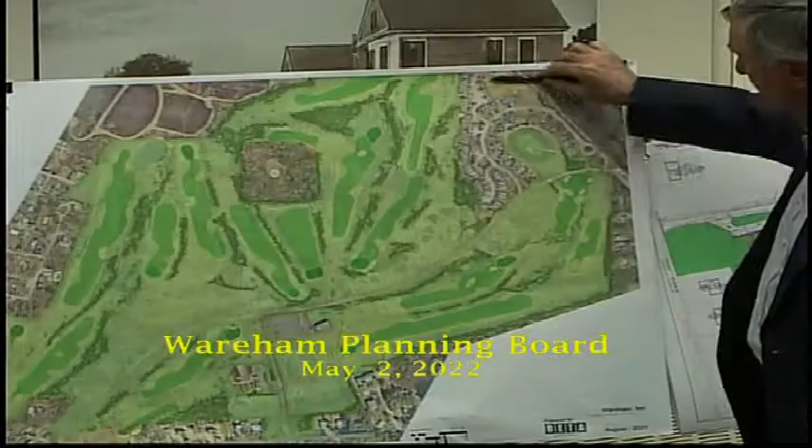So in 1964, the current Bay Pointe Club was designed by Geoffrey Cornish and came onto the market as Wareham Country Club. Some time went by, and in 1981, the property was transferred to Weedick, which was a quasi-public town of Wareham entity. In 1987, Weedick sold the property to Four Points Development. And at that time, none of this was here, so the entire property was all Wareham Country Club and a golf course.

Four Points Development Company developed the Bay Point Village Association and ran into some difficulty, and in 1991 transferred the property to BPG Corporation. None of these names mean anything - I'm not trying to be technical with names on deeds. I'm just giving you a sense as to the travel of the property.

In 1993, this property was financed by Bay Bank, a now defunct entity. Bay Bank restructured it and brought Weedick back in, and for whatever reason, and I don't know the details of it, again not important, took the 7 acres and transferred that to Weedick. Successor in interest was the CEDA entity, Community Economic Development Authority. So from 1993 forward, we've got the failed development of Bay Point Village at that time.

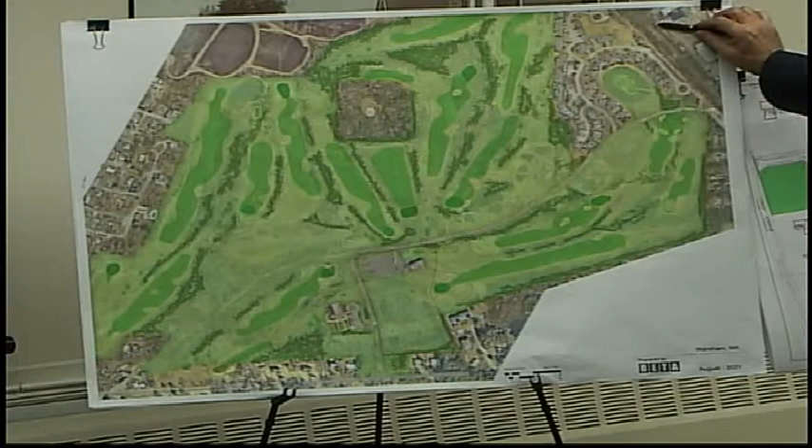Very successful now - I'm saying that by point of reference and time frame. Wareham Economic Development Corporation owned this 7 acres. With that were a series of easements that ran between the golf course and Weedick, and between the golf course and Bay Point Village. So that's the early stages of what was there.

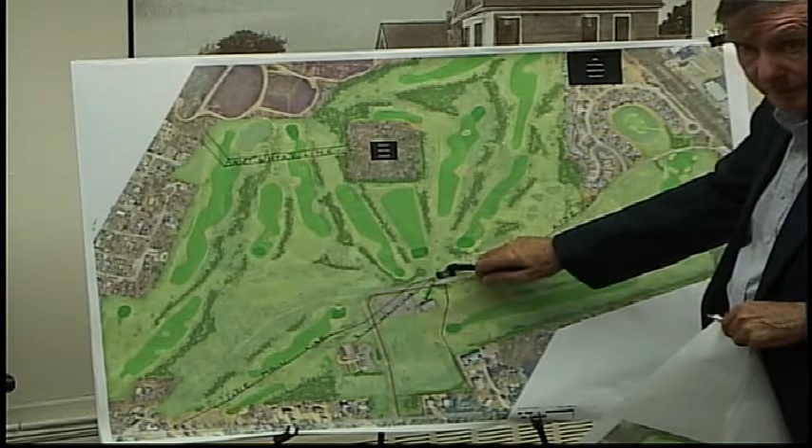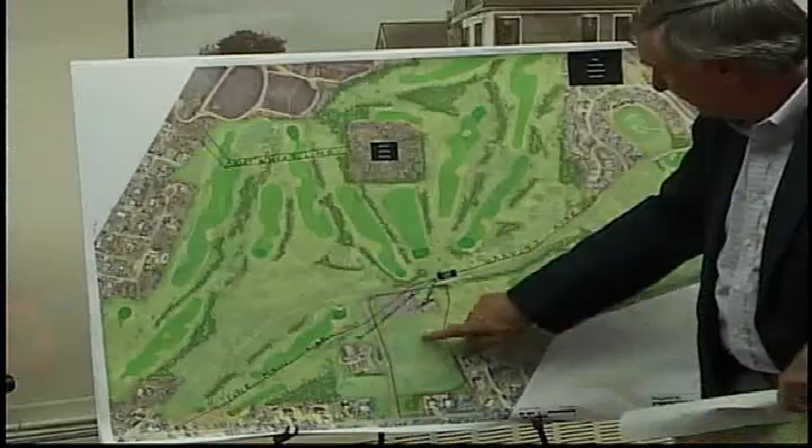So from that, Bay Point Village, owned by the same entity that owned the golf course, in 1989 put in a gravity line to the pump station that sits directly across from the Cedar property. Three gravity lines go into this pump station: a gravity line from Bay Point Village, a gravity line from the clubhouse, and a gravity line from the pavilion building. Those three go in, and the three go out to a force main down by Lacasse on Onset Avenue. Does that make sense? Does everyone have a point of reference as to what that is? The outline in red is the Cedar property.

So as you roll the clock up a bit, in 2002, Buzzards Bay Golf, Inc. acquires the property, I think really from Baybank and its restructured deal from '97, '98. Then in 2006, they sell the property to MLG, which was Mark Gibson and his development group. The property went into foreclosure with Digital Credit Union, with Mark Gibson being the owner, MLG, in 2011, and we acquired the property in 2012.

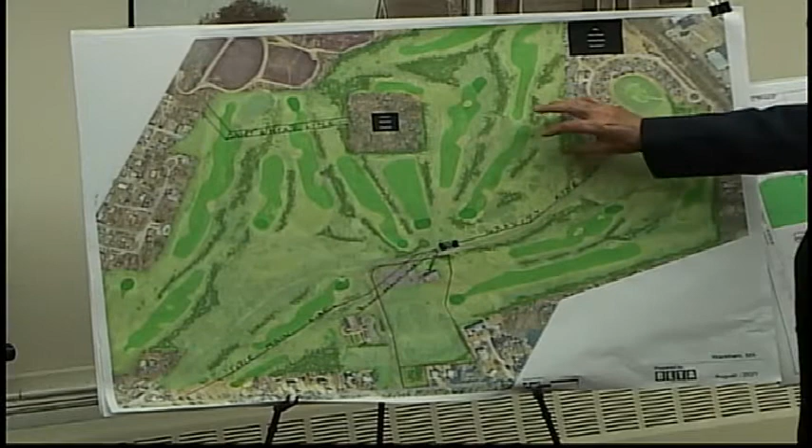From 2007 to 2011, the Gibson Group was advancing a plan for 40B housing. When we came in, there were plans everywhere for upwards of 260 40B housing units that apparently a development group called Minicelli was involved with.

They were trying to advance that, and then it kind of collapsed on its own weight. So from 2012 to 2022, we have owned the golf course. We've improved the golf course, and we've been advancing our vision for the development.

From the very beginning, we've been trying to acquire the Cedar property. As you pull into Bay Point Drive, the property is owned to the right by the town and to the left by the owners of the Bay Pointe Club. It's what's prevented us from being able to really do an entrance.

The early part of the property that the town owns is zoned residential. The balance of the 7 acres, we believe, is in the CR zone, although on a standalone basis it would be a non-conforming use because it doesn't have 100 acres associated with it.

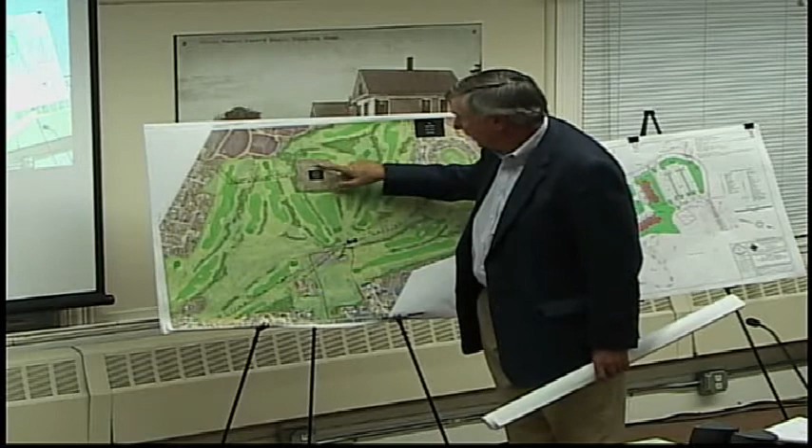In addition to that, the Onset Water Department, the big water tower that you can see, has an underground line that goes out into neighborhoods and the water tower. So that's what was there when we arrived. Gravity line along the property.

All this is Bay Point's property. We own all this, down to the pump station across from the clubhouse. Gravity line from the clubhouse to the pump house. Gravity line from the pavilion to the pump house. Force main out onto Onset Road. Make sense?

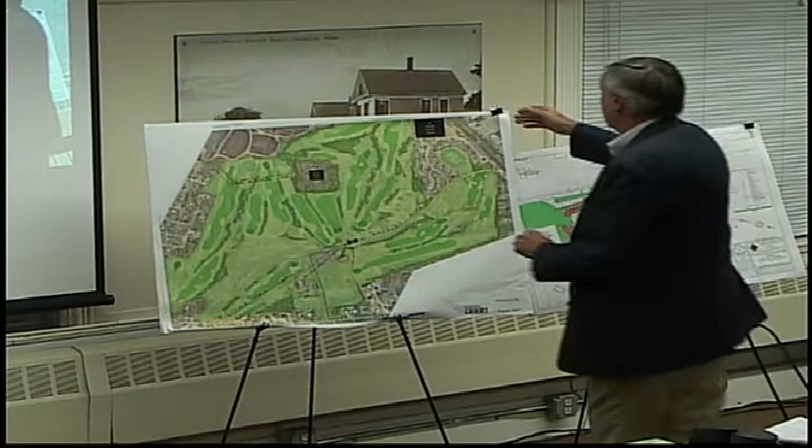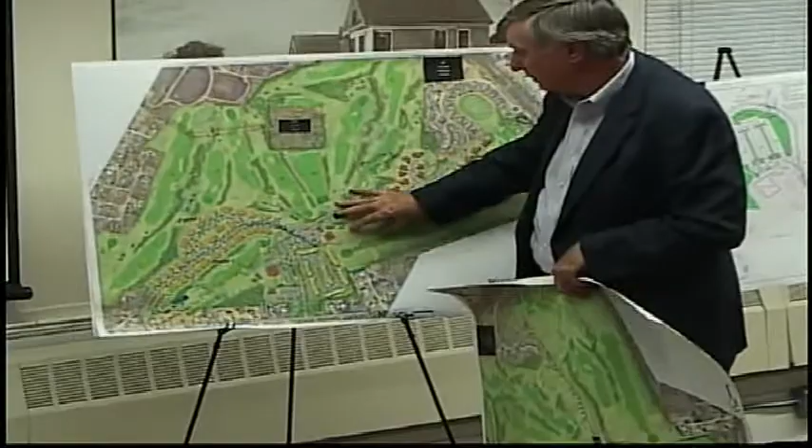This isn't exact, but most of it's exact. This is a couple of versions ago. There have been some minor changes. This is for illustration purposes. The number of buildings and units is correct. The number of units in phase 1 and phase 2 are correct.

I was surprised when the Bay Point Village came to the meeting with certainty and said they owned the pump station, and they said I needed their permission to do what we were doing. And they said a few other things.

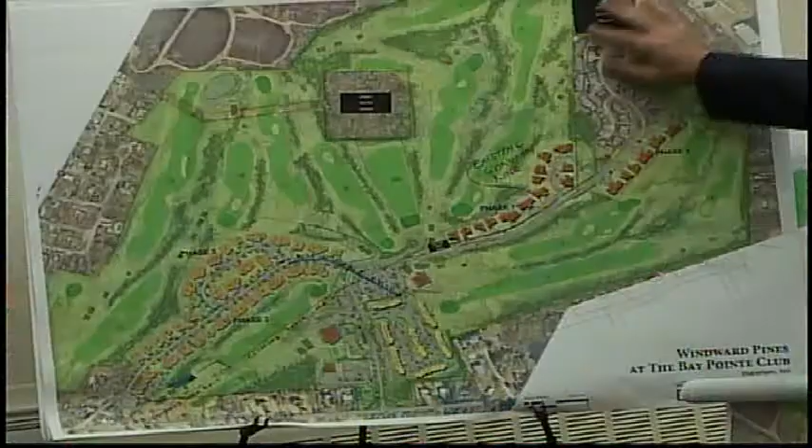So when I arrived in 2012, the Bay Point Village Association's president was a gentleman by the name of Richard Secker. Very nice man—he had an unexpected heart attack in 2017. We weren't here very long, and he invited me to his home, and then we went and got a bite to eat, and he said, I have a problem.

You own real estate that carries our effluent to this pump station. There was an agreement, verbal, over the years for sharing the expense of the pump station, but there was nothing in writing. And I said to Richard at the time, that makes no sense to me. We need to diligently search some records, because I can't imagine you'd do a development and not have easement rights down to exiting your effluent from your property.

Pretty important issue, right? You got a problem. And the owner of this property says, oh, not so much, let's take that out—they have no sanitary sewer, water, discharge. So I had said to him, the way that you correct that is we'll do an easement document. And that easement document has to provide for us to be doing the development that at the time was contemplated.

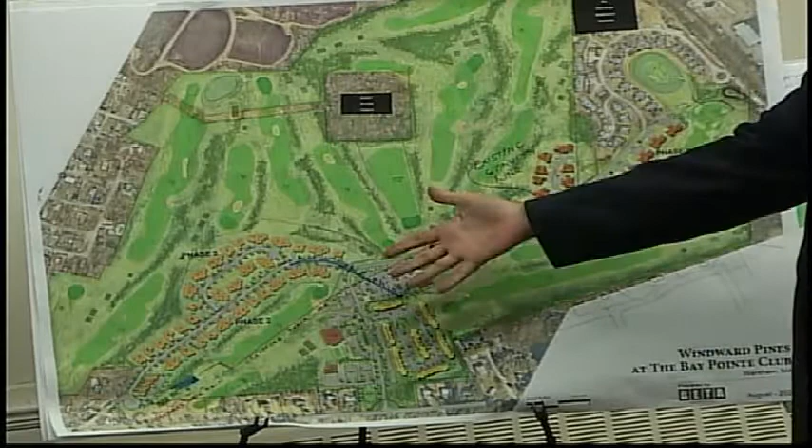I wasn't in for approval. We knew that we wanted to do development. So he says, that would be great. So the two of us sit down and we, in short order, come up with the business side of that arrangement, and we draft an agreement.

And the agreement is titled the Easement and Sewer Pump Station Agreement. And we did that in 2014. That agreement provides for a lot of different statements that were made that just aren't correct.

Highlights of the agreement: the first whereas clause in the agreement states the Bay Pointe Club owns the building, the real estate, the buildings, and the equipment. I've submitted the agreement—I believe that you have it as part of the public record.

Secondly, it provides a very specific track for approval—that we go in, we seek municipal approval, we get that municipal approval documented, and then we come back and certify and demonstrate that there is no additional burden or cost associated with the Bay Point Village Association. We don't need their consent, we don't need their approval.

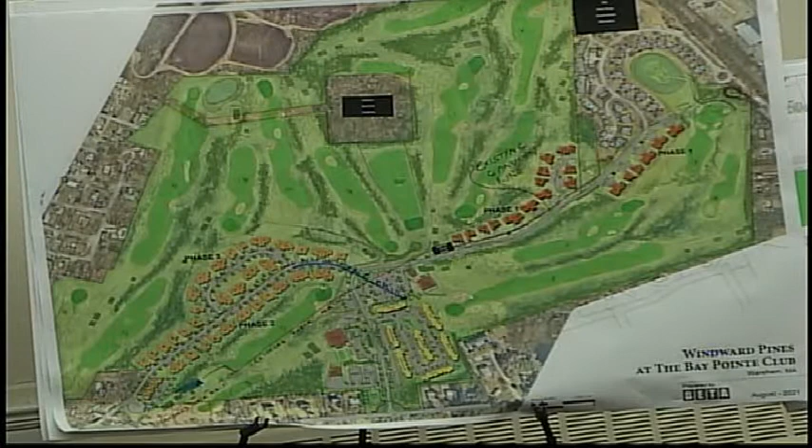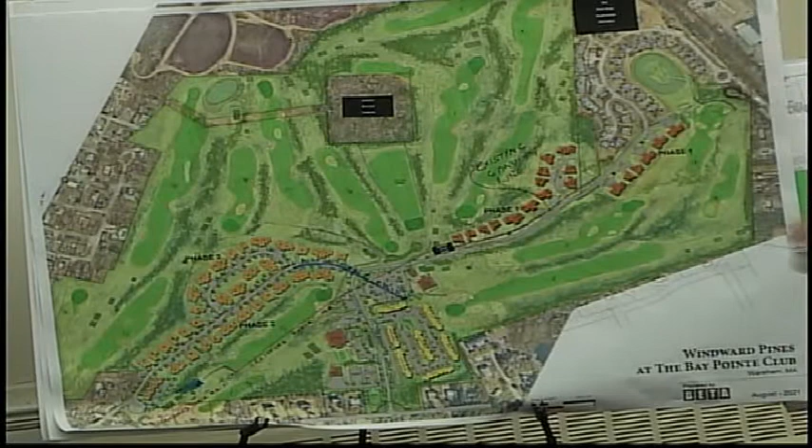We put the document together. I used in-house counsel. Bay Point Village Association used Marcus Errico Emmer & Brooks—MEEB is the entity's name. They're up in Braintree, a law firm that specializes in condominium development. Good group of people. After 2014, I had used them on 2 other matters. I'm currently using them on a project up in Uxbridge.

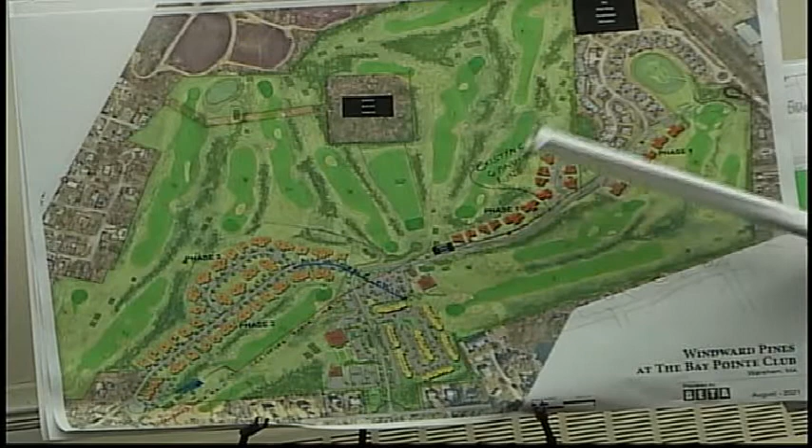And when this issue came up, they said, look, the rules are pretty clear—it would be a conflict. You need to use someone else, to both parties.

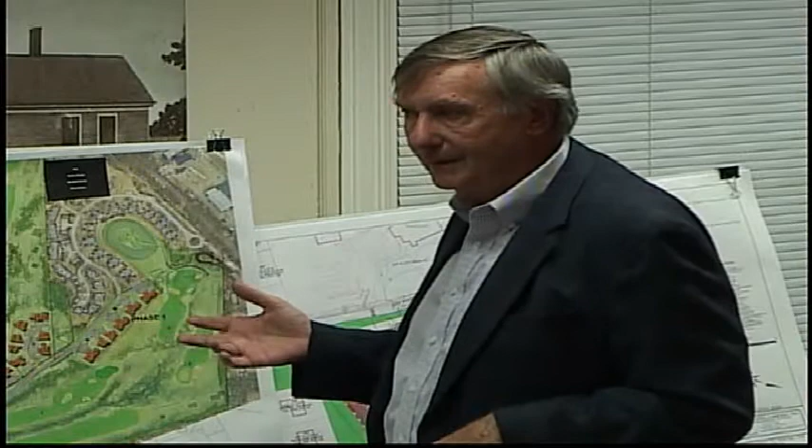The first evening of testimony, it kind of sounded like I ran out and hired their attorney. And I took a little bit of offense to that, because that attorney was never involved in this conversation from my perspective. That attorney conflicted themselves out because they had represented me on some other matters.

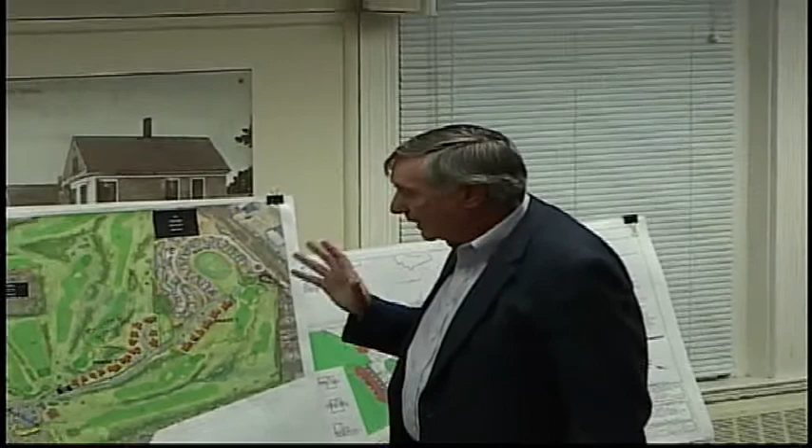So when we talk about the pump station, and we talk about who owns the pump station, there's not a lick of confusion. This pump station has always been part of the overall property. It has an easement granted to the Bay Point Village, and the first whereas in the agreement states that I own it. So I'd like to put that issue to bed.

Our objective was to move quickly through this process because it's important for a lot of different reasons that we get the entrance and we get the clubhouse, which is now in its 2nd year of being closed, open. This has been and continues to be the front door to the Bay Pointe Club. And I need resolution to what we're doing with the Cedar property.

So we took it upon ourselves to say, you know what, I can argue that, and I can win, because that's what the documents say. Do I want to have an argument at this planning board? Do I want to take that easement agreement and spend 3 of your valuable nights arguing over the merits of that agreement, or running to court, which is a whole different issue?

So what we decided to do, which was done in pretty quick order, and it didn't look like it to you guys, or you collectively, because it just looked like we were extending - but the first 2 extensions, we redesigned a whole new pump station.

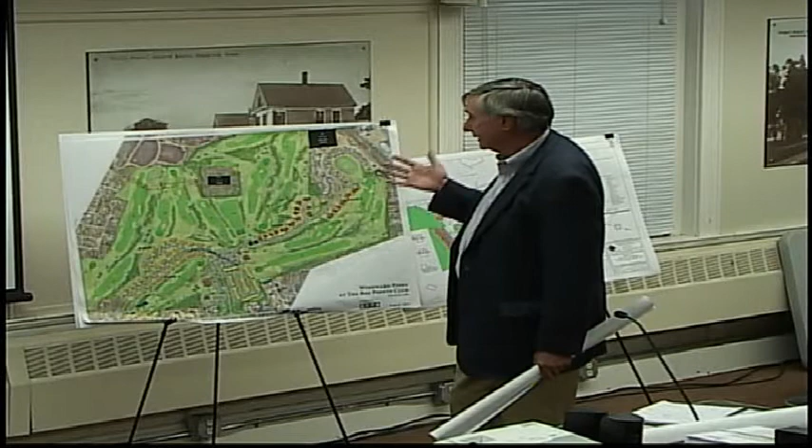So, in the end, this is really the overall now of what started in 1964, went through a series of owners, 2 different bankruptcies. The town has been in and out a couple of times. There's a battery of easements by and between Bay Point and different owners of this property.

And I think we have a great solution. I think we have a really good, solid development plan, that needs to go through the scrutiny of all the engineering type review that it gets. So with that, that's the non-technical version of my overview.

Does it make sense to everyone? Are there any questions? Yes, sir, I do have one question, if I could.

So, I mean, I love the idea of coming up with a Plan B to avoid a fight, obviously. That makes no sense - nobody is gonna benefit from a fight. But what is the potential problem down the road if the Bay Point Village line that ties into - you're gonna abandon the line that goes out to Onset Ave, and you're gonna tie it into a new pump station owned by you, correct? Already approved, in phases 2 and 3. But what happens now if that fails?

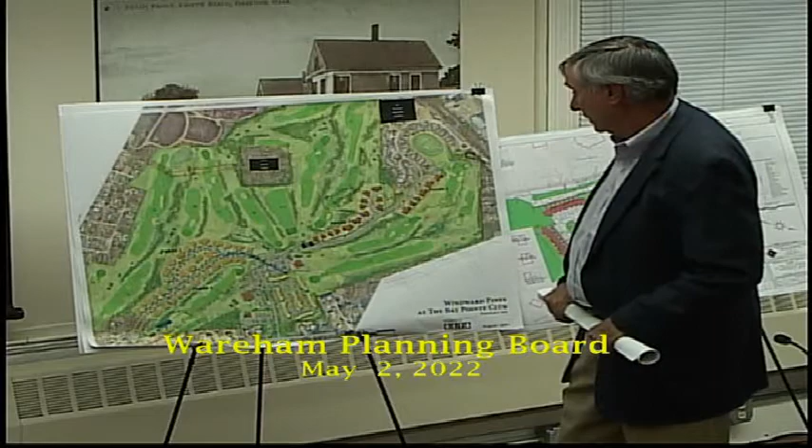I think that's a pretty comprehensive overview. That was the only question that I had. Is anybody on the board? Are you done with your questions?

Sure, okay. So I think you've addressed, at least so that I understand, the pump station issue. I have an understanding of it and I can process it. If we can move beyond the pump station.

Can I ask a question about the pump station? Not yet, ma'am - the public hearing will be open for comment. So, thank you, I think I have a grasp on that.

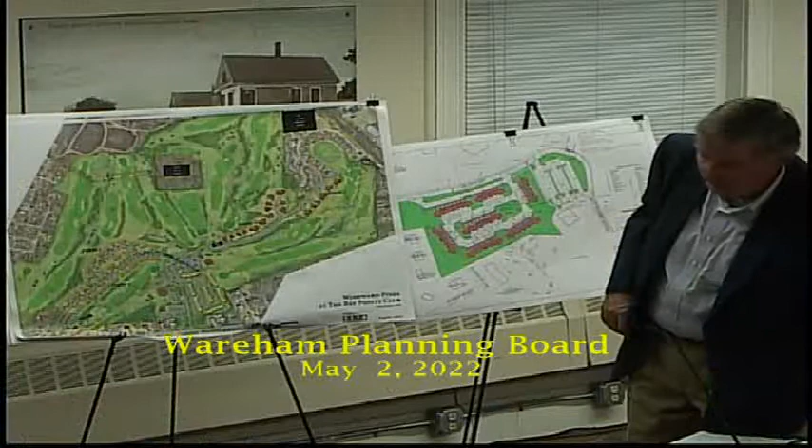There's a couple of other questions that have come before it, and maybe using that chart you could answer them. There's a question about a sidewalk down to Onset Avenue - is that part of your plan, and can you point to that? Yes, so included in the phase 1, 2, and 3 approvals, the sidewalk comes down this side of Bay Point Drive.

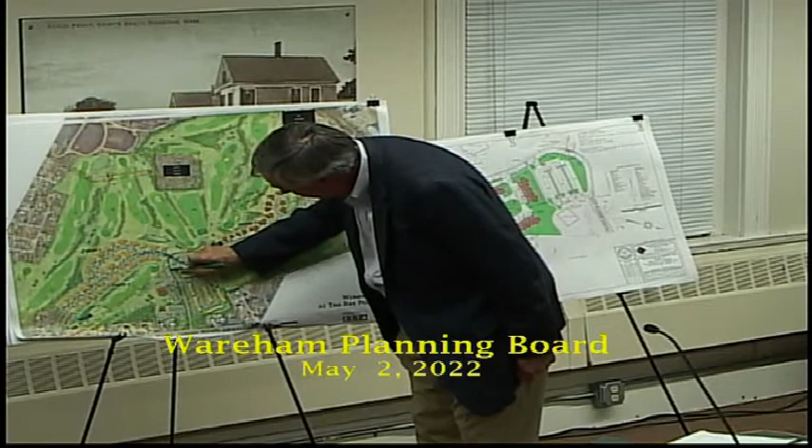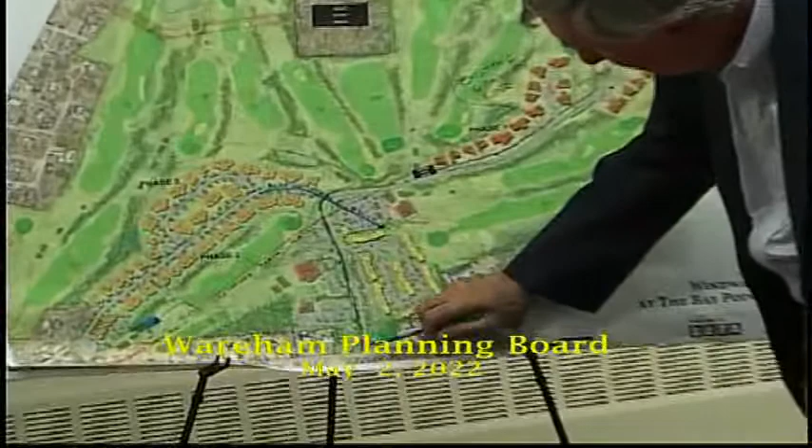So the reason you're not seeing it in this phase 4 plan is because it's already part of what we're required to do in previous phases. So once we determine where the road finally lands through this process, this sidewalk will be constructed. From that perspective, that takes us to

the next couple of points that I wanted to make. Oh, I didn't want to get ahead of you. That's why I asked. No, that's fine - that's where the sidewalk is.

So as we complete this process, the Bay Pointe Club is going to acquire from the town of Wareham this 7.5 acres. When they acquire this 7.5 acres, it will then be merged with the balance of the real estate that the Bay Pointe Club owns.

There's a couple of reasons to do that, including there's a lot of perpetual easements that ran between the Bay Pointe Club and prior owners for parking and different issues. All of the easements kind of collapse on their own weight - the grantor and the grantee will both be the Bay Pointe Club, and at that point they no longer exist.

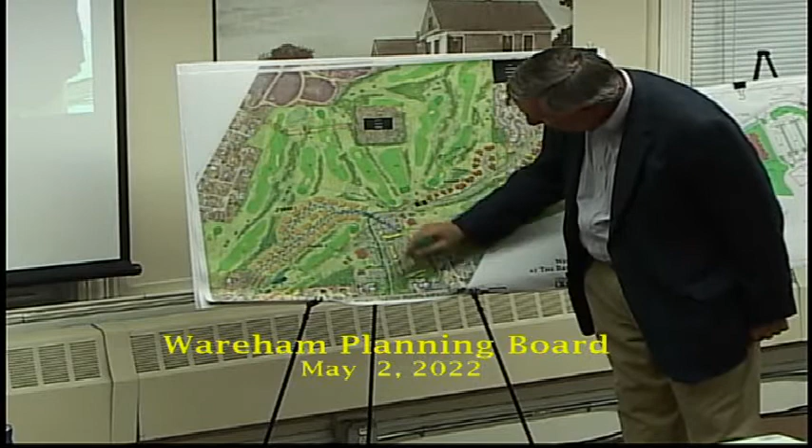So by doing that, there really won't be any property lines. The property line will be along the residential piece and up here, but everything along the road is privately owned - the Bay Pointe Club owns the road. So this acreage is going to come in and be part of the Bay Pointe Club.

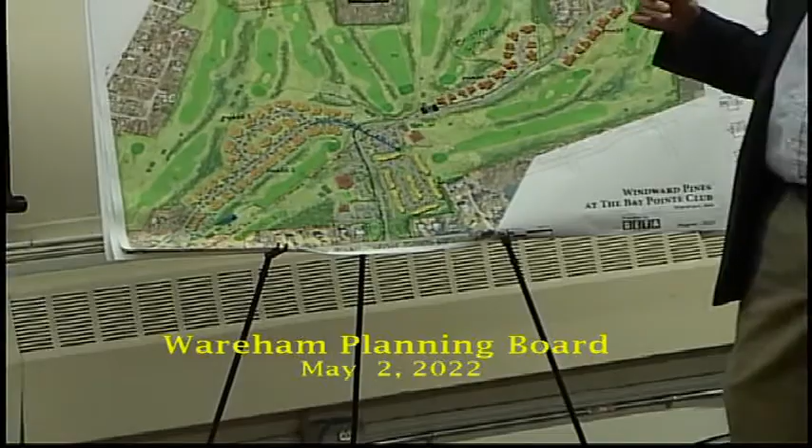Does that concept make sense? Does that satisfy the 100 acres that you need for the development? By doing that, that satisfies the question about not having 100 acres - it's exactly what it does.

That property now is 154 acres, so whatever the additional 7.5 acres gets to, it no longer is non-conforming - this stands alone at 7.5 acres in a CR zone.

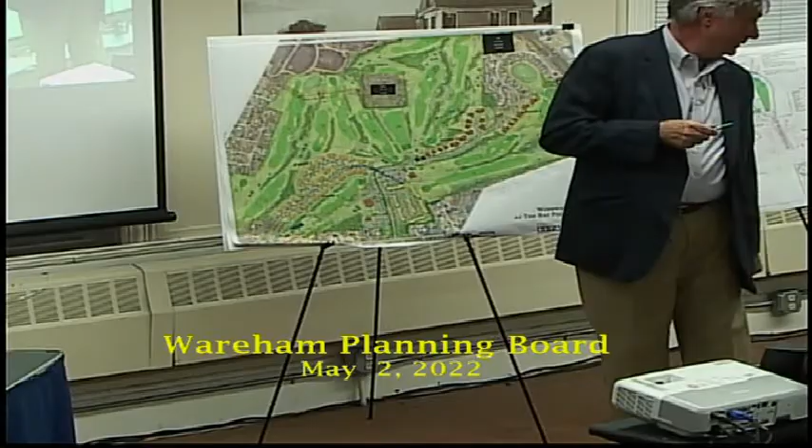Okay, so did I hit all the points? Mr. Fay, a couple more questions. I like this chart, thank you. And I'm trying to bring forward questions that I've heard from the public. Sure.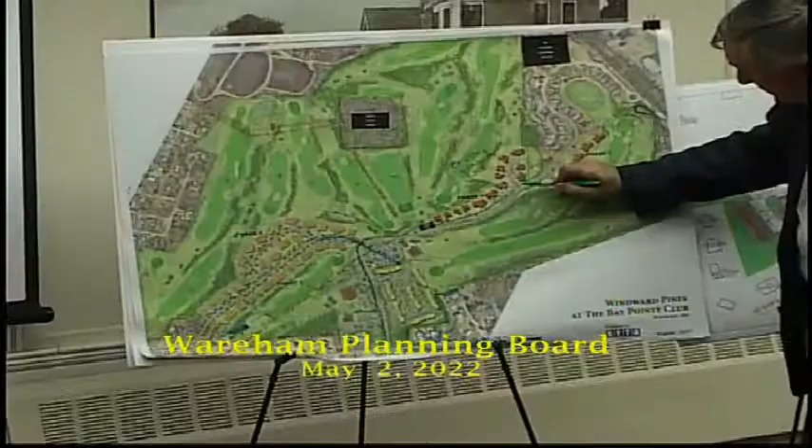One other concern we've had - I've been looking at the streetlight plan. I know you're planning to do some things with streetlights. Can you indicate on your plan? Do that, Chris - do you know where the streetlights are? Recognizing this is not the engineering diagram, but approximately, you're gonna put streetlights in - there's a streetlight at Jetty, and then at all the intersections?

So in the zoning code, you require streetlights at all intersections, and then at Starboard Drive, both sections - here and here? Yep, here and here.

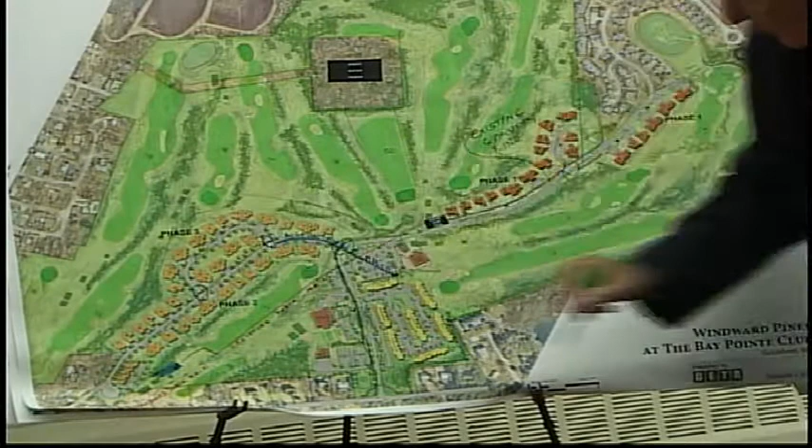These will be normal - they're not stop and shop quality lighting up a parking lot trying to land a plane at night, but decorative streetlights that will light up a street at the intersection, with the appropriate number of foot candles at those intersections, yes.

Okay. Will there be one at the Bay Point Village, where it comes in as well - the Bay Point Drive extension into Bay Point Drive for Cahoon? Is there one scheduled to go there, Chris? Repeat that question - is there one at the Bay Point Drive extension connection to Bay Point Drive or Cahoon?

I don't think so. I'm not sure about that one. I don't know if there is. Could there be, if we felt that that was required?

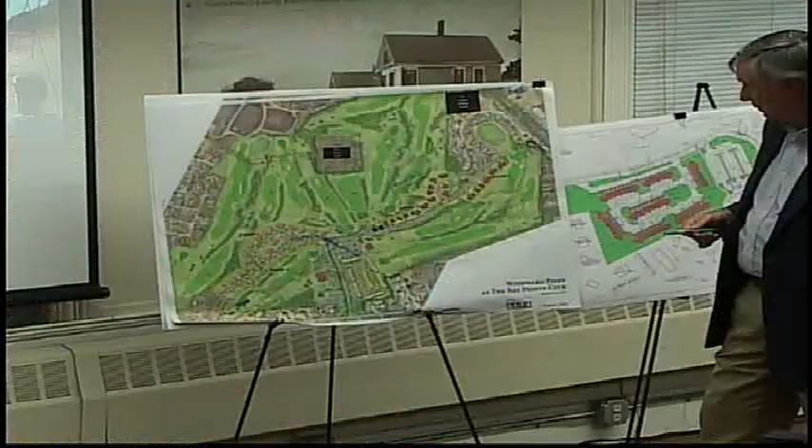And these are hardwired streetlights, not solar powered. So these streetlights are not solar powered, those are going to be hardwired. Yes. Yep.

Okay. Forgive me, because I don't remember the particulars of phase one. Does the covenant for the neighborhood require a post light at the end of each drive? Or does it not require it? We have done that in several different instances, so it doesn't make for a dark street. I'm just looking at phase one, and I see one streetlight for that whole area. Correct. We do have some solar lights on posts. Well, and there were no streetlights there before.

That was kind of the reason why I asked the question and why I was leading in that direction - some of the concerns from residents has been that the streets are dark, and the solar lights, especially after 2 or 3 cloudy days, do little or nothing to illuminate the street for safety. And especially where the sidewalk is not yet in place, that would kind of make for a dangerous situation, I would think.

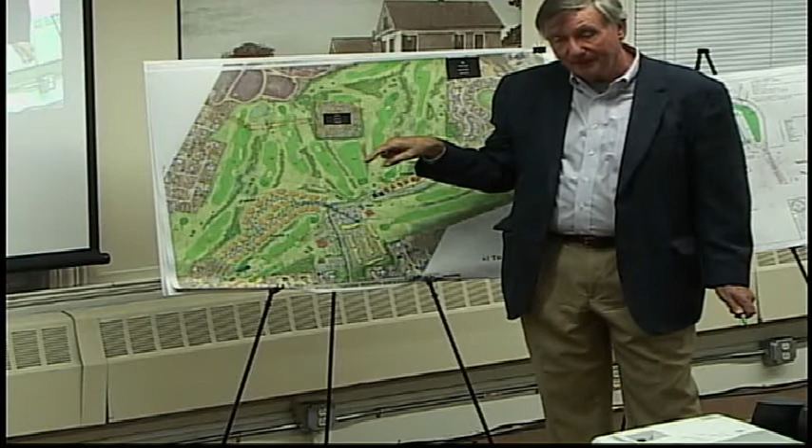So as far as conditions of approval, that could be put at the top of the list. How long has it been since phase 1? Well, all that's left is now - we finished the top coat towards the end of last season, and we need to clean up some landscaping on the sidewalks, clean up the sidewalks, and install the light. That'll be done by June 30th of this year. Okay.

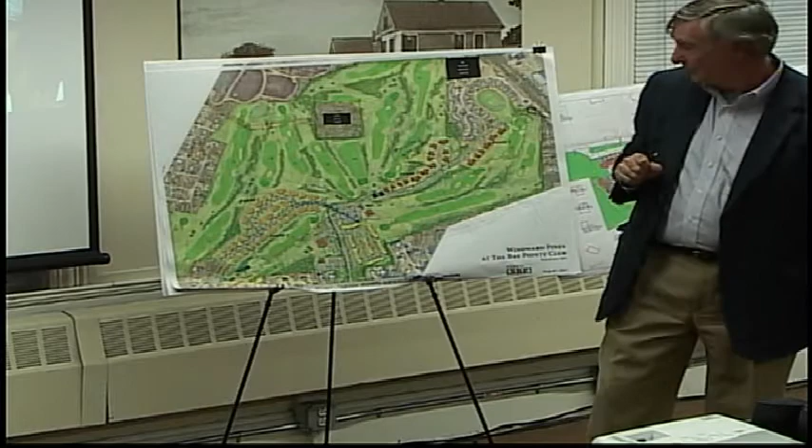Okay, any other questions from the board before we move along to the next? I will. Maybe another street light back at the extension? Yeah, at the extension. One more thing on streets - will there be streetlights in phase 2 and 3? We didn't talk about down here. Yes, just at that one intersection? Here? Here? Oh, and there, okay, thank you, at the intersections.

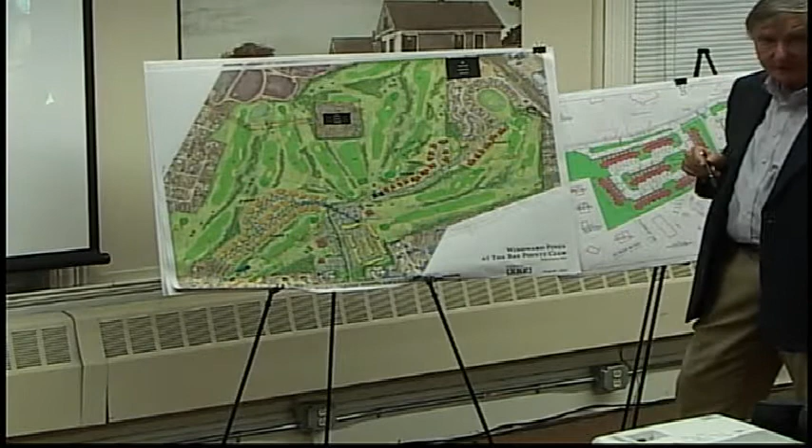Yes, at the intersections. And through you to Mr. Buckland - intersections is what the subdivision control requires, right, for streetlights? The subdivision control requires streetlights at a certain distance, not just at the intersections. So would we need additional ones in that long stretch there or not?

I don't remember if you had lights at the end of the driveways - I don't think you would need extra streetlights. It's a fairly low trafficked roadway, not a lot of decision-making and interaction between vehicles and the road.

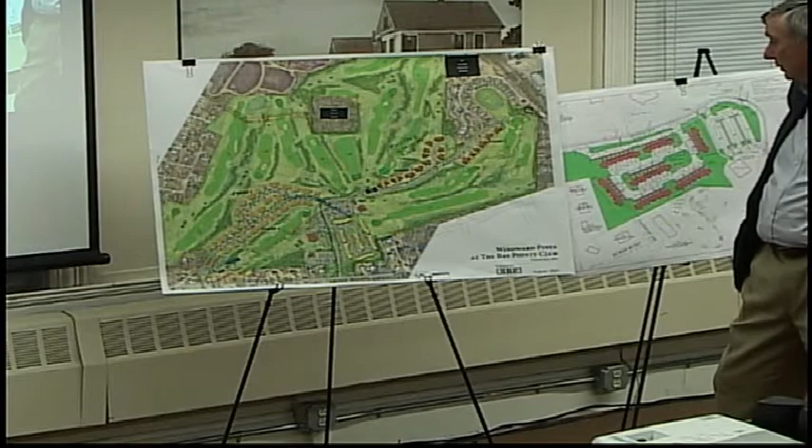Okay, Mr. King, through you back to Mr. Fay - did you say that you have post lights on the end of the driveways? On some, yes, on some. We added that after - it wasn't part of a requirement, it was part of our landscape plan to do that. Okay, so we'll have major streetlights and we'll have lighting along the street. Thank you.

Any other questions? You have any more to present? We do. Okay, go, please. So move forward.

Get to sit down now as the least technical person, and now we can bring a new team up and would like to go through our answers to Mr. Rowley's letter and have that discussion. So Karen Beck from Tom Principe's office is going to take the lead on that. And Bill Rosa.

Thank you, ma'am. Thanks, Janet. We can share. Well, I only have the one, so if we can just kind of, I'll hand it off.

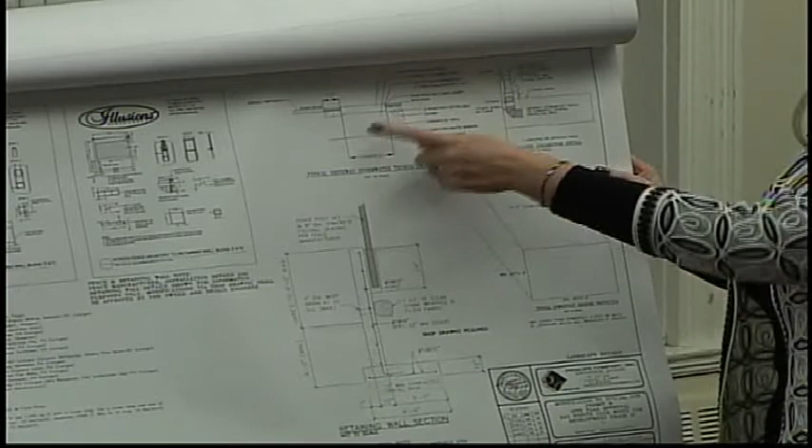So the typical driveway stormwater trench cross-section, that's between the driveways on the backside of 3 of the buildings. The downspouts discharge to this gravel trench in that instance. Here are the downspouts, and again, they're shown on the landscape plans with a dark spot that is labeled on the landscape plans. And this goes to the stormwater trench for the downspouts.

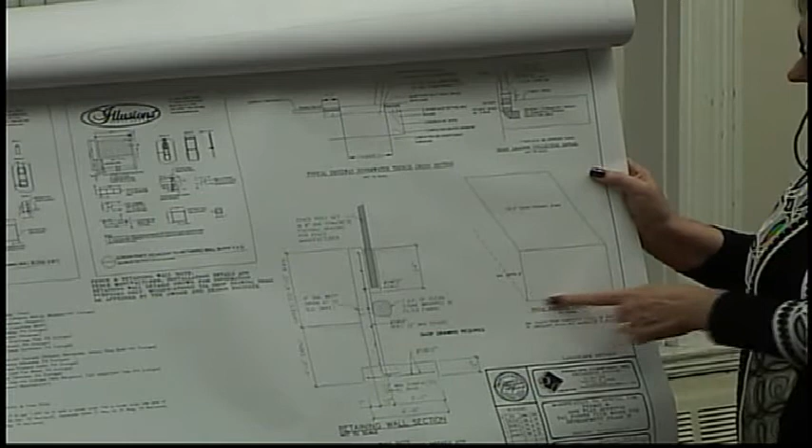And then the trench itself is the typical downspout erosion protection, where we've got a minimum depth of 8 inches, 8 inches wide, and a minimum of 3 feet in length. But that trench length could actually be increased, because basically what we indicated was that 3 feet was the minimum.

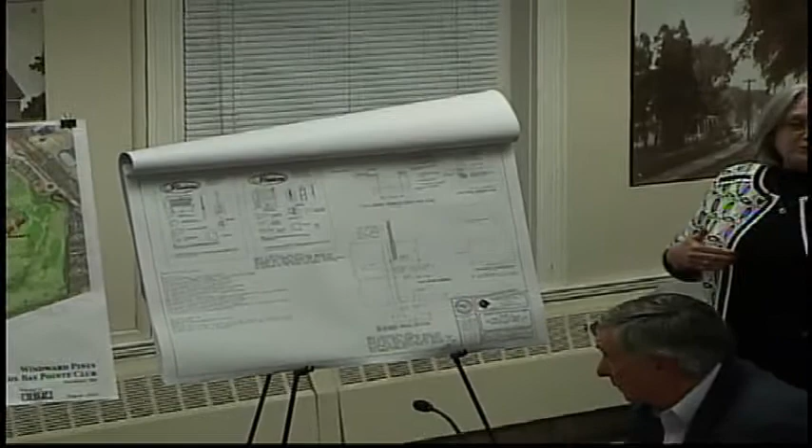And if the wood mulch area for the landscape adjacent to the building is longer than 3 feet, we would increase the distance of the trench as well, so that we wouldn't have any erosion through the wood chip mulch. So all of those areas are much above and beyond what is typical for a standard residence.

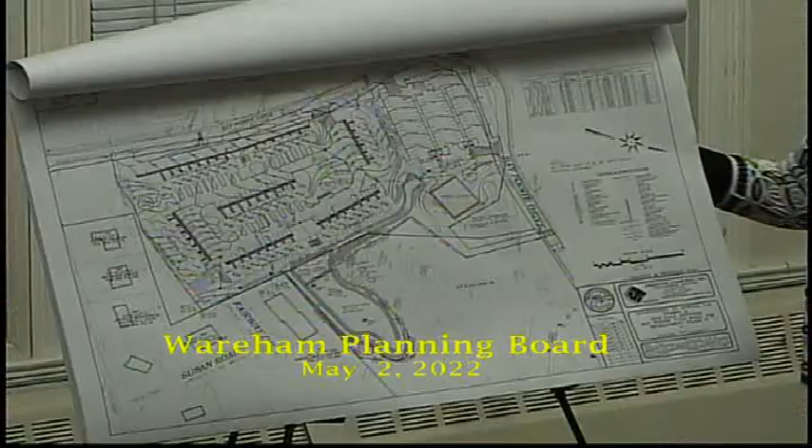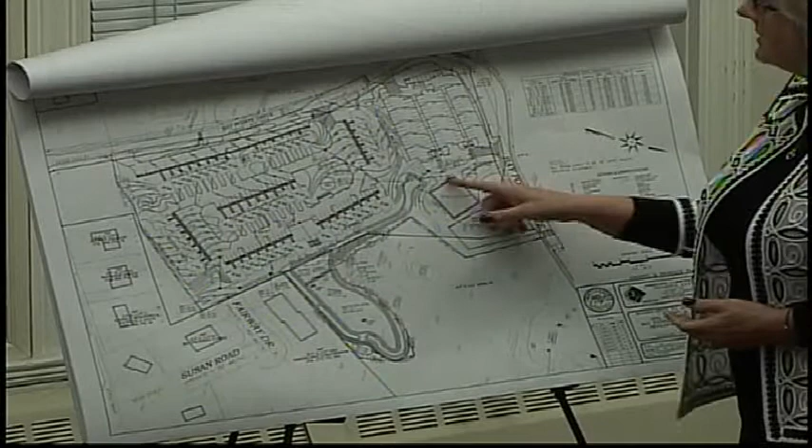We're discussing the pro shop, and as you can see, there's a line shown on 3 sides of the pro shop with a little D associated with it, and the question was whether that was a trench drain. It's not. What we're proposing is to have the downspouts for the building tie in and discharge to the stormwater, so we put a note on the plan to clarify: downspouts to be piped to forebay. And again, the downspouts already have a detail on the plan.

You see it, Paul? I don't see it, no. I had to look twice. Oh, downspouts piped to forebay. I had to look 3 times before I found it. Thank you.

As previously requested, 12-inch long hoods for the pipe outlets for the double-grate catch basin are not shown. There's a note on the plan for the single grate catch basins that has a very intricate detail for the 12-inch hood. The note on the double grate catch basin just said the hood, as required, needed to be provided, but we can make it clearer on the detail that it's a 12-inch hood. Again, it doesn't change the type of catch basin, it's just a component of that detail - a construction note detail, exactly.

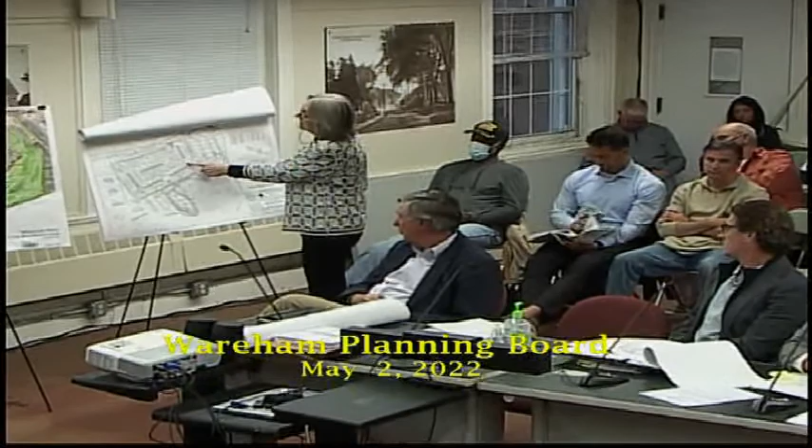In this particular instance, if I can show you on this grading plan, there are 2 catch basins we're discussing: a double catch basin right here, and a single catch basin here. This one has a total going into this pipe of 9 and change CFS.

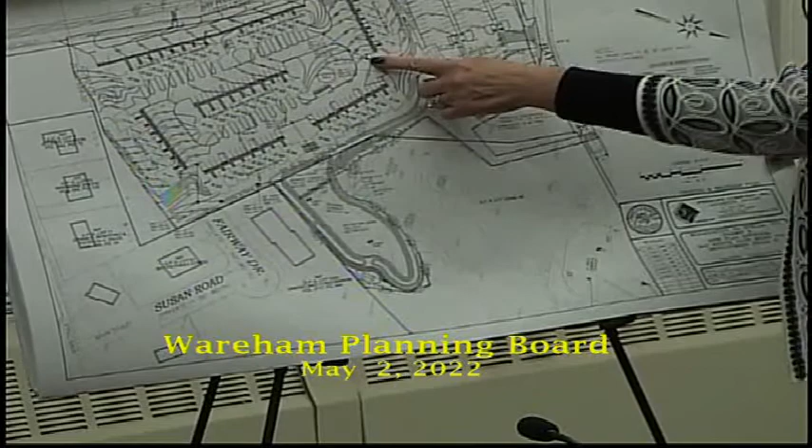This catch basin over here has only 6 CFS going into it. However, the difference between this scenario and that one is that we've got multiple catch basins trapping surface water to get them into the piping system, so we're not concerned with 9 CFS getting trapped, because we have multiple catch basins and multiple pipes. It's a much more robust system, quite frankly.

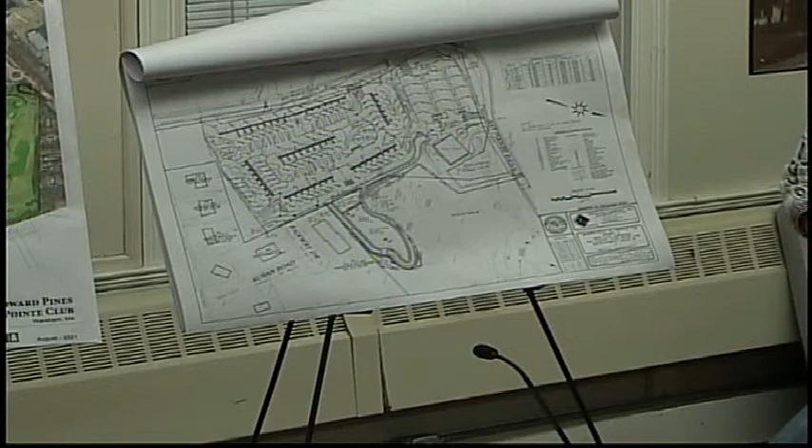In this particular instance, this entire parking lot is draining to this catch basin here. Now that's not necessarily a problem, and we certainly can have one catch basin that will control the flows for 6 CFS, and the piping system will control 6 CFS. But out of an abundance of caution, we made this a double catch basin so that we have a bigger square footage surface area to allow the water to get into the catch basin system.

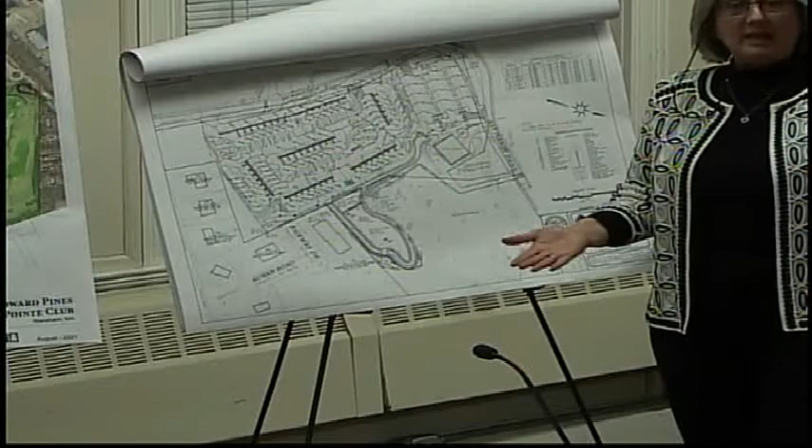And we made the pipe system double as well, again also to make sure that if for some reason there's leaves or sediment or something like that, we want to make sure there is no flooding in this particular instance. So we overcompensated by doing a double catch basin and a double pipe system. And looking at that, we realized we had left the 24-inch diameter pipe outflow that we had proposed.

That would be problematic with only a 5-foot interior dimension catch basin structure. So we are going to drop the size of those 2 pipes to 18 inches instead of 24 inches, and that will work with that size basin. And again, it's out of an abundance of caution.

It's not required to be double, but we wanted to make sure that there was not going to be any instance where we had flooding in that particular area, because we do have handicap accessibility, et cetera, in that particular vicinity. So again, it was an abundance of caution, not because there was an issue.

So those are all the details relative to the changes that Mr. Rowley had requested, with the exception of some of the comments that had to do with handicap accessibility, as well as landscape buffers and where driveway access portions are. So if I could hand off, Bill, I believe you have your comments for comment number 5 and number 6, which are relative to the landscape areas, if you could take those.

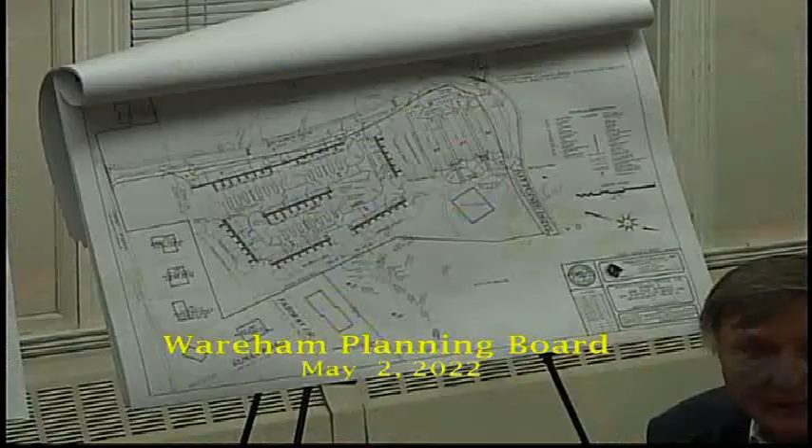I want the pavement located so I can then locate the sidewalk. So I understand what you're saying. I do believe that at the turn, that has changed from what is there today. That's correct. So that's my point — the layout was changed, and it was approved under the subdivision control law.

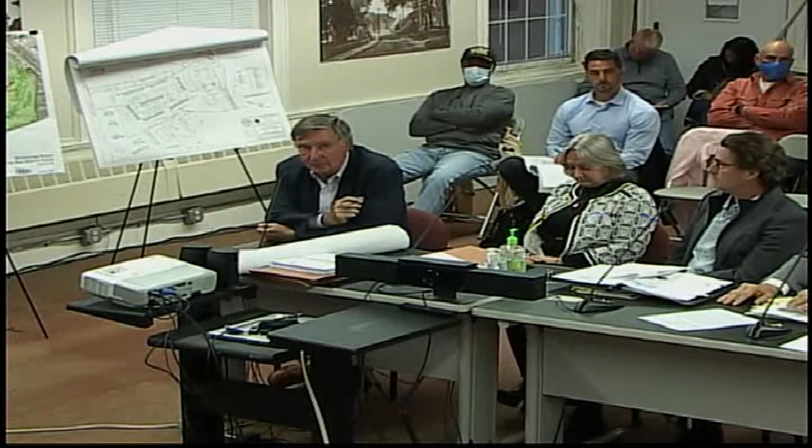So we're not making any changes to the configuration of the lines that define the road. Correct, there are no changes taking place there. Correct, but the road itself, when we make these improvements, will look different than the road that's there today. That's absolutely understood.

That was my only point — with locating the sidewalk, the intersection at Starboard Drive is going to look entirely different than what you see out there today. Correct, understood. I don't understand this point at all — that has no bearing on the issue I have of putting individual landscaping features and a driveway for this last phase within the layout of Bay Point Drive.

Right, and where are we doing that, Karen? Can you point that out for us? Sheet 6 shows — I'll be the layperson asking the questions. So, on sheet 3 of 18 is the site layout plan.

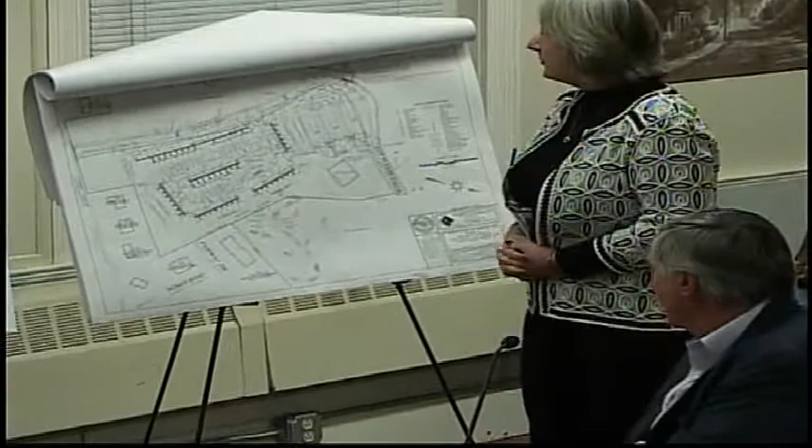If you see where it's labeled Bay Point Drive, private width varies, you'll see a very dark line, and on the other side of that dark line is Building B, 6 units with garages. Does everybody have that location? Yep.

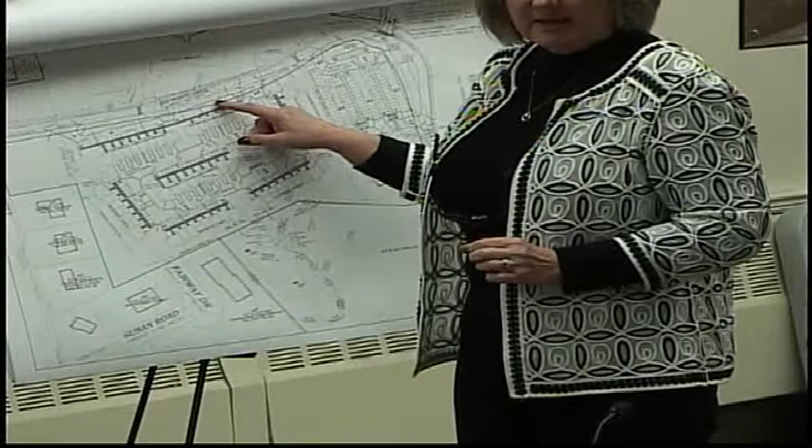From my understanding of Mr. Rowley's point, right now that right-of-way line, easement line, property line, whatever you want to call it, that's the dark line. As of today, on one side of that dark line, Bay Point owns. On the other side, the town owns. So the town owns where the buildings are right now, okay?

When and if this property is sold to Bay Point, this lot becomes part of the overall development. Again, Bay Point Drive is private.

This property will be private, owned on both sides by the same property owner. What we're proposing is that the access drive, as you can see here, is a one-way access drive. It comes in closer to Onset Avenue, comes along the front of the buildings, and then comes out again onto Bay Point Drive. There is a short section of the access drive that's within the right-of-way, if we're going to use that terminology.

Between that and Bay Point Drive is where all of our proposed landscaping is. That's where it currently is today—between Bay Point Drive and the development there's not much there other than a parking lot, quite frankly. But there's existing vegetation in that area, with 3 or 4 different entrances off of Bay Point Drive to that property. So we're going to continue and maintain as much as possible the existing vegetation, but we're also adding to it in the landscape plan.

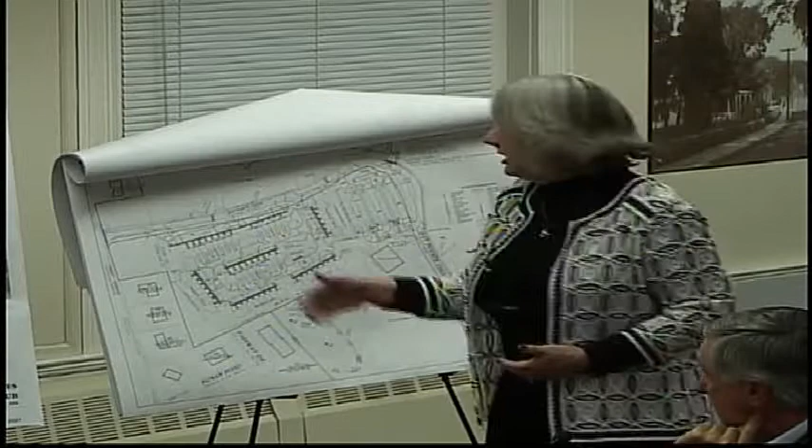So between Bay Point Drive and those residences and the parking for those residences, there will be a landscape buffer. But that landscape buffer, in some areas, is on the development side of that line, and in some areas, it's on the right-of-way or easement portion of that line. So the landscape buffer will be there, it will function, and it's been designed by a registered landscape architect. It's just a question of where that landscape buffer falls once the property is sold and Bay Point Drive is owned.

Again, both sides of that line will be owned by Bay Point. That's not how I understood it—if I understand what Charlie's saying correctly, you're proposing landscaping inside the layout lines of the road, regardless of who owns either side of it. It's still within the layout lines of the road.

That's the concern. I think it's going to stay in the area that is currently vegetated with no utilities within it. So there's currently vegetation within the layout lines of the road? Yeah, nothing's been done there. It's just woods and trees that have been left since day one.

But I think they're missing a very important point. They don't own it today. The parcel that's under consideration is not owned by them today. It's owned by a separate entity.

Even if the town or the redevelopment authority, whoever it is, conveys a parcel to Bay Point, they're conveying a parcel. It does not automatically become part of the incorporated Bay Point Club, or the 100-some-odd acres that's there, unless they re-describe the entire parcel to include that after they own it. That's just legally the way it happens.

Is that true? They will be conveyed a parcel of land, described in some manner to go around that 7.5 acres, the way it's shown on the plan—a 1993 Bremen engineering plan that actually created that lot. So I would assume they'd use that plan as reference and convey the property as shown on that plan. Once they do that, it'll be a separate lot to them until they come up with a description that incorporates it into the entire parcel.

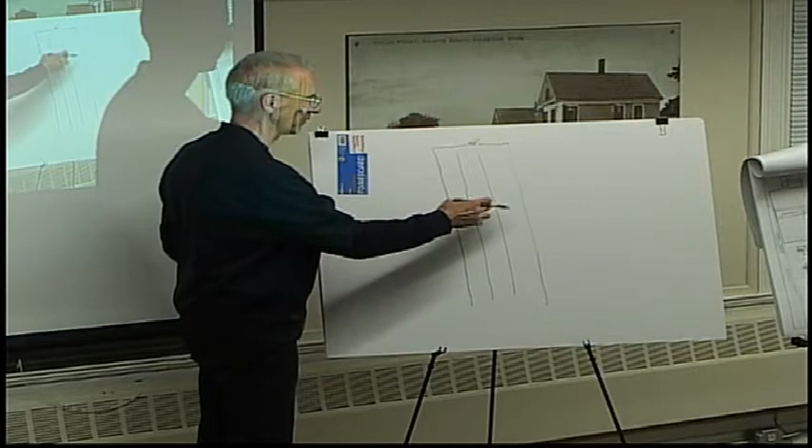Before a project comes before the board, you understand the rules and regulations that the town has, control the rights of way where we put in the subdivision road and the utilities for subdivisions of land. The distance, the right of way itself, is something like 40 or 50 feet. That's the area in which all the utilities and the road, the access, everything that moves through the area provides the access to the adjacent land, so you can subdivide the land and develop it.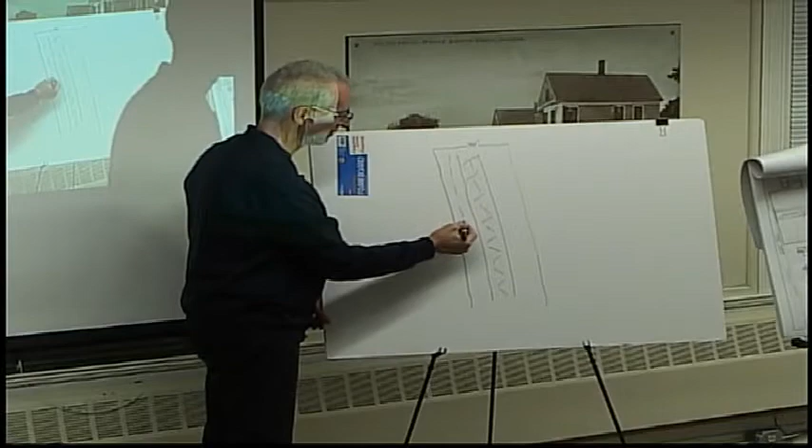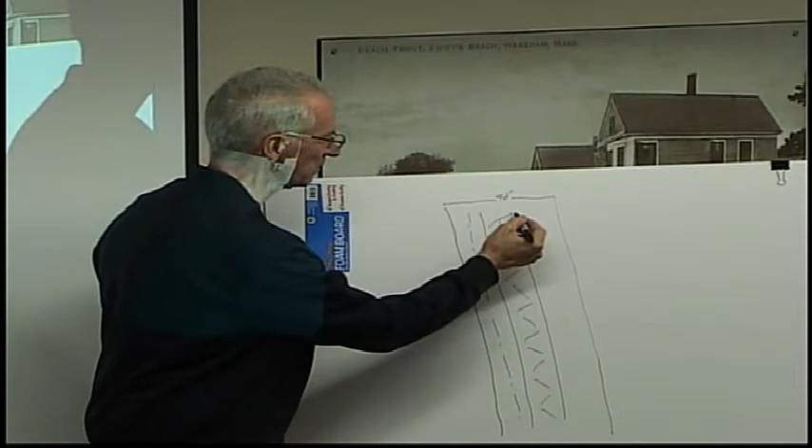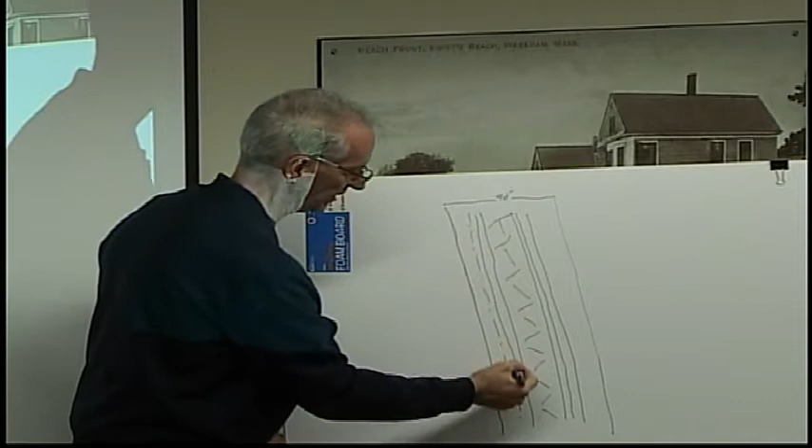This provides all the support to the adjacent developed land, but the layout of the road itself, the pavement, is something smaller. It could be 22, 24 feet or so, where that's the road, and beside it or underneath it could be utilities, underground or above ground, a series of telephone poles, or more commonly what we like to see is underground utilities. Then you have a sidewalk as well running along the road, maybe on both sides, and maybe it runs over one of the utility lines too. What you don't want is too many of those overlapping, so you don't have to dig up one to get to the other.

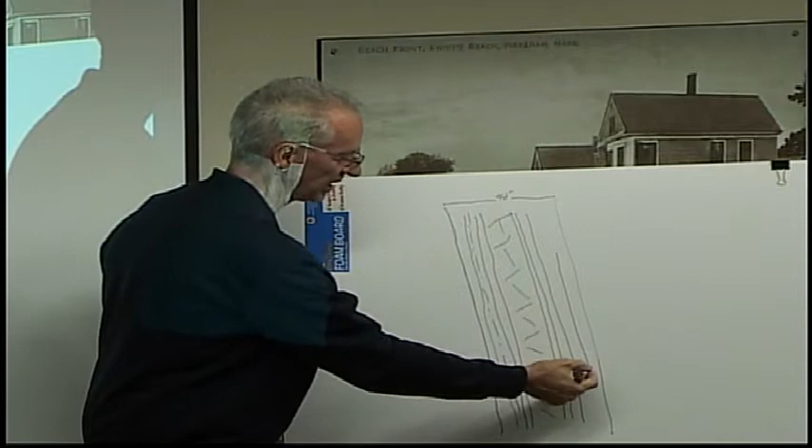But in doing this, there's also the addition of a buffer, a vegetative buffer along the side where you have street trees put in, and that buffer of vegetation can be used to beautify the street and make it look a little nicer as it's improved with green vegetation.

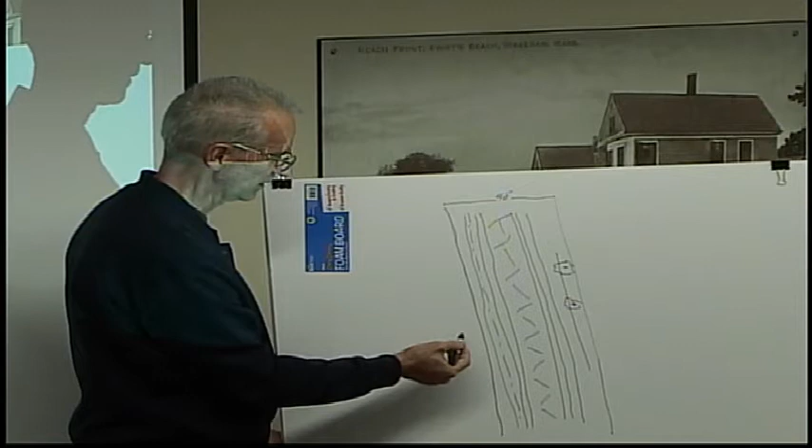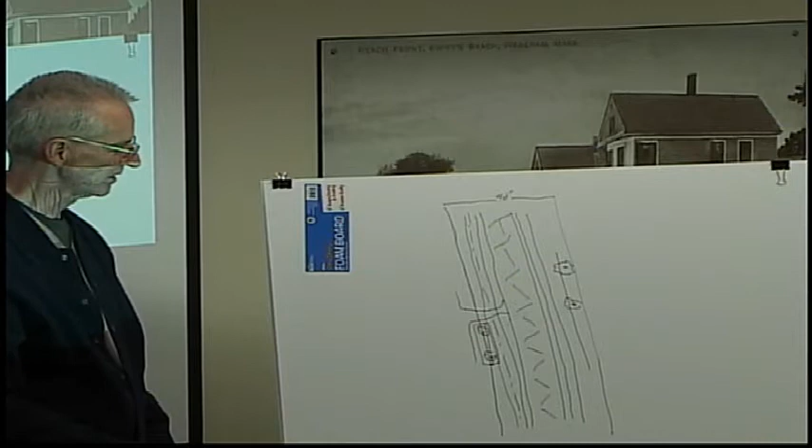What's happened is the adjacent property extends a landscape island into the right-of-way, maybe making it more substantial, where some vegetation is used as a control on the passage of vehicles through the driveways that connect to the roadway, where a driveway comes in and runs along, with a landscape buffer in between. It's quite common to have landscaping in the right-of-way along with the utilities and the pavement itself.

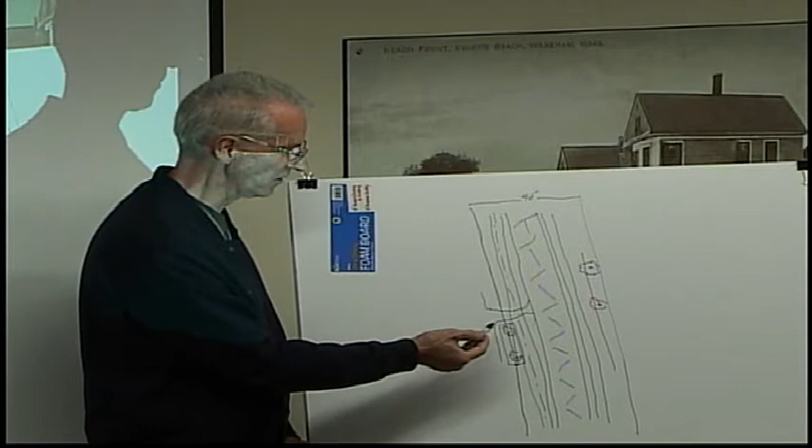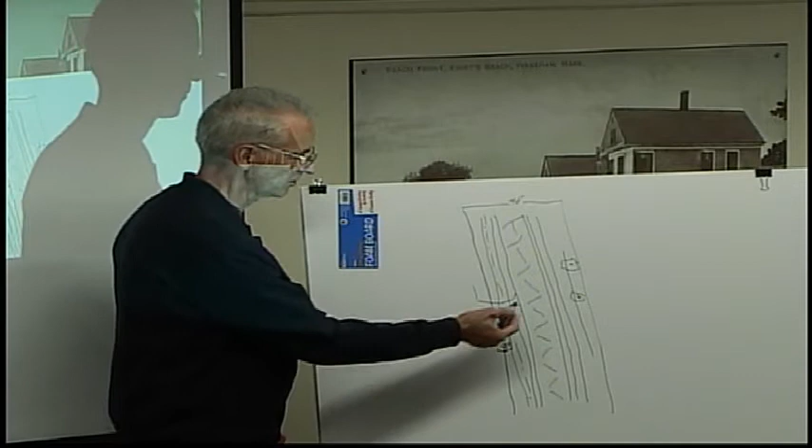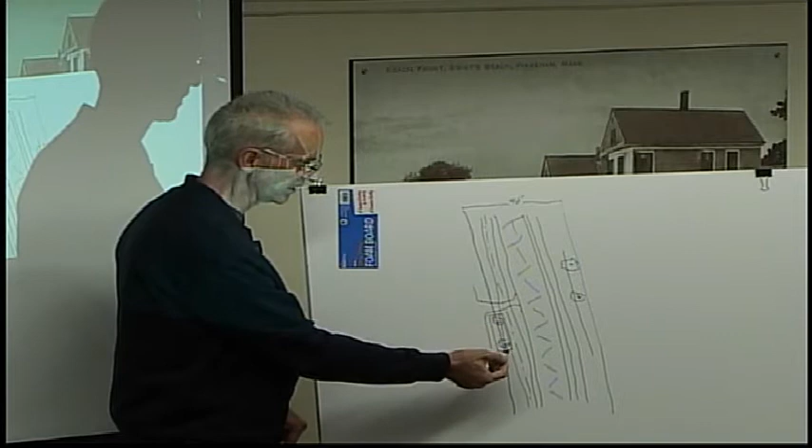The other thing about this is you also have the ability to waive the requirements of the subdivision rules and regulations too. You can say there should be more trees or fewer trees because there's other natural vegetation already there, or that some portion of the right-of-way has to be set aside for a vegetative buffer as well.

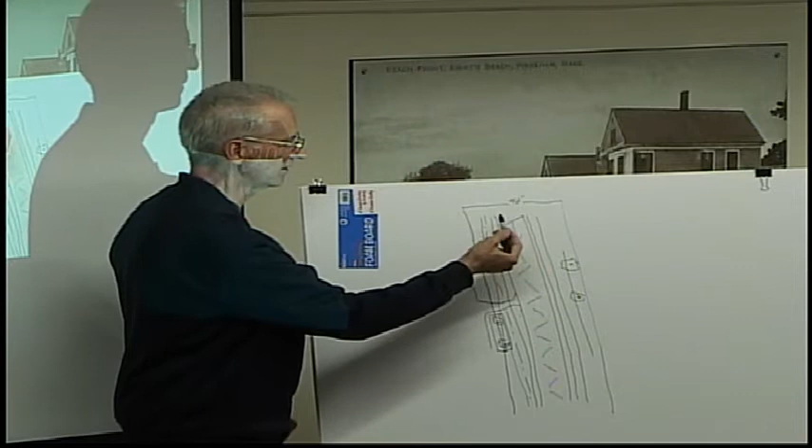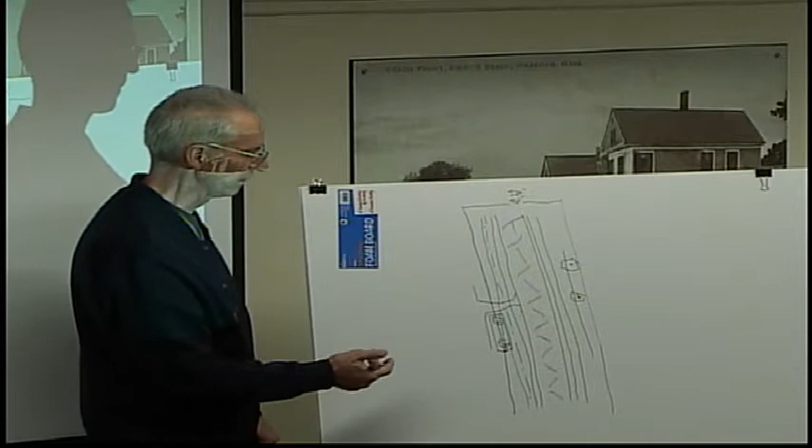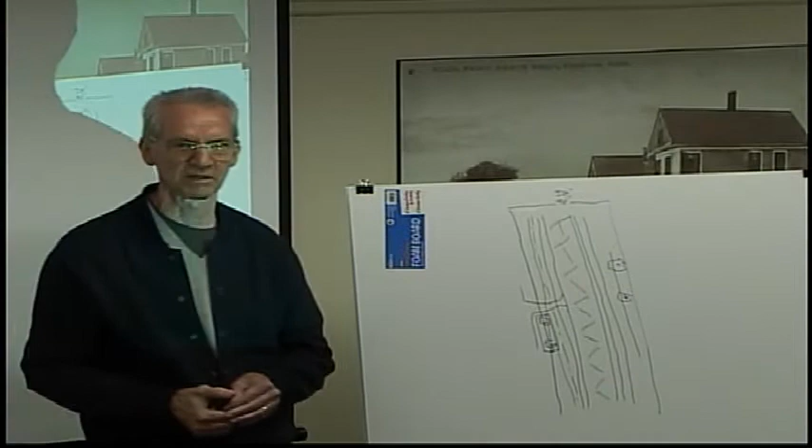It is possible that you could use that if you have the additional area that goes beyond the roadway and the utilities and sidewalks that run through there. Typically, the right-of-way is much larger than is necessary for all the access and supporting infrastructure that allows you to develop the adjacent properties. So it seems this is not as serious an issue as maybe it's made out to be. You may be aware that in cul-de-sacs, the landscape island in the middle is sometimes put in place to improve the look of the roadway within the right-of-way.

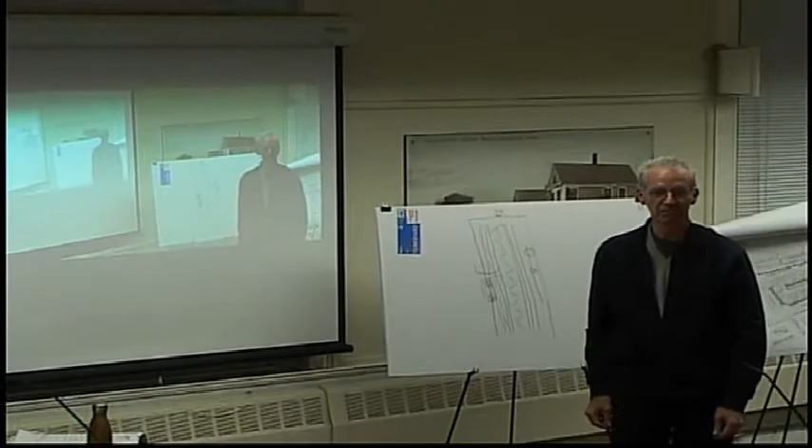Mr. Chair, through you to Mr. Buckland, just a clarifying point. You said we have the option to waive subdivision rules and regs, but not if this isn't a subdivision plan review, right? We couldn't waive it in this case. No, you have to have, if necessary, a hearing for the subdivision, you can do that with that. That was my understanding, thank you.

I'd ask, Mr. Chairman, that you take a look at sheet 6 of the plan. If you look at sheet 6, over in the extreme left where the road entrance comes in to Building A, you'll notice that the driveway for Building A is all on the property, and the beginning of the landscaping is also on the property.

But as you move to the north, you'll see that that driveway crosses over the layout line. And for half of the landscaping, which is in front of Building B, it's all been pushed out into the layout, because that's where the driveway has been thrown out. That driveway belongs on the property itself, not out into the layout of Bay Point Drive, where it interferes with the potential for utilizing that strip for utilities. That's what I'm trying to say. So it's not just a matter of a little landscaping here and there, that's not all of it. It's only a portion of it. Understood, understood, okay, but thank you.

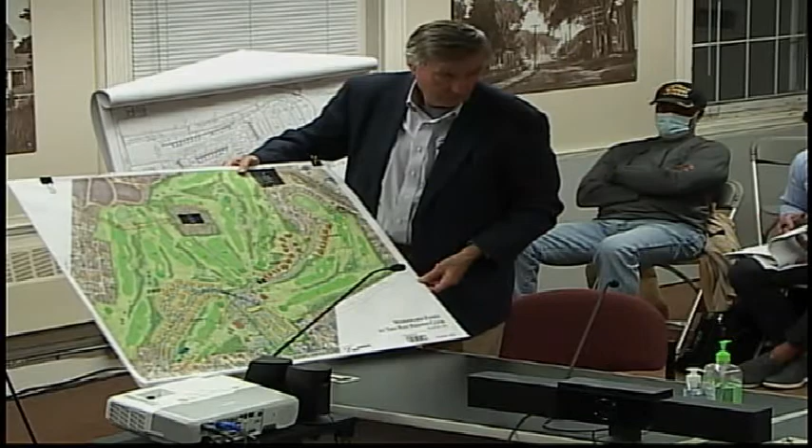So even though it's not an expense for us to maintain it in Bay Point Village, we are still dependent on it, though. Sure, because at the end of the day everything flows—we're all dependent on that working properly, just as we're all dependent on the current pump station working properly.

Same concept. So the control of this new pump station, which ultimately handles everything, would be in the control of the Bay Point Club. There will be an agreement—there's an agreement right now between the Bay Point Club and Bay Point Village. There'll be a similar agreement between these entities. Proportioned out, you mean? Proportionate, yes.

And, Mr. Fay, what happens when you're done with all of your development, and your phases are all completed, and you're left with running the golf club and the pavilion and so on? What if you decide to sell? Who controls the sewer arrangements?

So, right, well, that's the correct answer—whoever buys it, but it will be an agreement that lives similar to all these other agreements we've been layering, one on top of the other, for all this time. This person would buy this agreement too? They buy it subject to, yes.